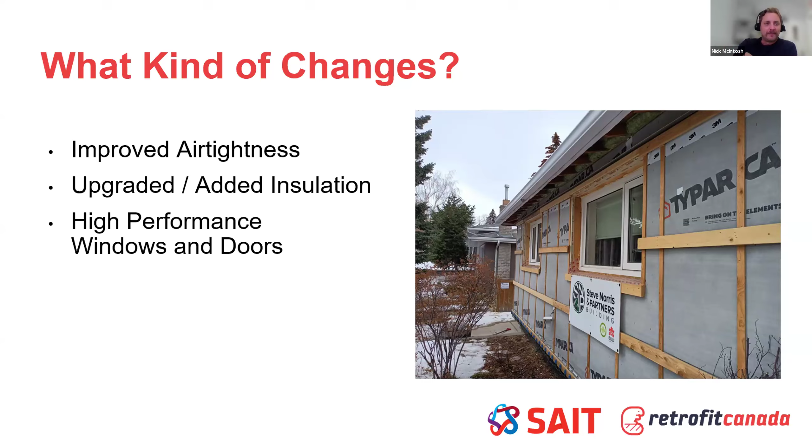As I mentioned earlier, those were building envelope focused deep energy retrofits. So you'll often hear us talk about a building envelope first approach. That means making the building as airtight as possible, adding as much insulation as we can to prevent that heat loss.

Once we've reduced the amount of energy required to heat the home, because if we insulate well, make everything airtight, and use high quality windows, then that heat or cool air stays within the house longer. So we don't have to use our heating or cooling system as much, and we can usually bring our heating system down in size.

So with a building envelope first approach, it's about reducing the amount of energy you need in order to maintain comfort and indoor air quality first, and then changing things to electrification that can be powered by on-site renewables.

When we're talking about electrification, upgrading to efficient heating - currently we're very commonly in Alberta using gas-powered forced air furnaces. So can we switch that over to a heat pump, which is much more efficient, requires a lot less energy, and is electric instead of natural gas?

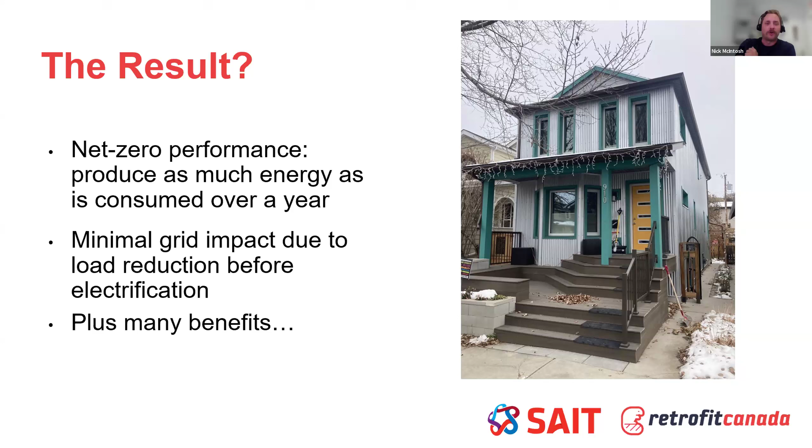This results in minimal grid impact due to load reduction before electrification. One problem that's been happening is if we don't have renewables on site to help with powering, we're putting strain on the grid. So we want to reduce the amount of energy we need and start putting renewable energy production with our buildings.

There are also many more benefits of deep energy retrofits that you don't necessarily see. This is a big thing we need to talk about, because some of this you can't really quantify until you've actually been in a building that has had these high performance renovations done, and you feel it for yourself. It's not necessarily something you can show anybody on a computer.

A big benefit of deep energy retrofits is improved occupant health. We're getting continuous fresh air coming into the building through ventilation systems, with good filters filtering out indoor or outdoor contaminants such as forest fire smoke, allergens, or anything like that. Constant fresh air is provided into the house, which allows us to stay more healthy.

Another thing you don't necessarily see is that we need to maintain a comfortable relative humidity in the house. If we get too low relative humidity, that can dry out our sinuses and we can end up getting sick. If we get too high relative humidity, that can lead to mold growth and things like that, which can affect our health. So improved occupant health is a very big benefit of high performance renovations.

Improved thermal comfort: we're wrapping the entire building in good insulation and making it airtight, which prevents cold spots within the wall assembly. So we just have a more even temperature throughout the building. We're trying to eliminate cold spots, like not being able to use the edge of a room because in winter it's extremely cold 5 feet into the house from the edge of that room. Nobody wants to go sit there.

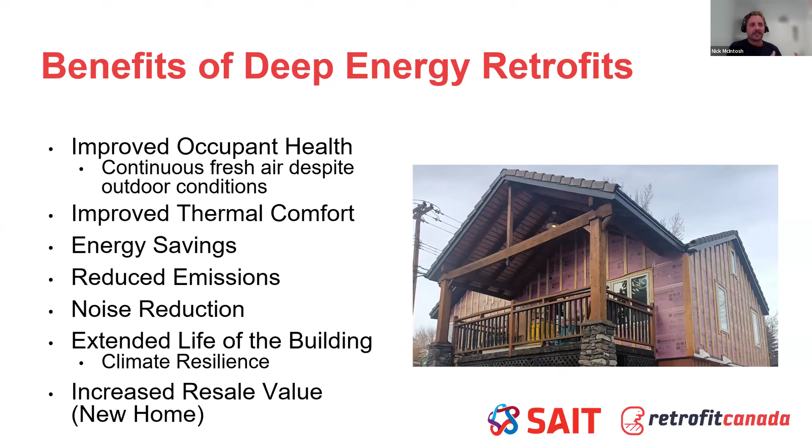And then increased resale value. Just by doing renovations, even, you're increasing the resale value of that house. By adding more comfort, improved thermal comfort, and energy savings, we've just increased the resale value of that home right off the bat.

So we have found certain obstacles to deep energy retrofits taking off at a very large scale. Obviously the big one that everybody asks about right off the bat is the upfront expenses for a full deep energy retrofit. They can be quite high. What we've seen so far is doing a deep energy retrofit to that net zero level, you're looking around $150,000 to $250,000.

But when we're looking at that, there are some things we do need to consider. We need to consider the cost of things that already needed maintenance. So if we were already planning to replace our heating system because it was at end of life, an old furnace from the 70s, we needed to replace that anyways. We need to consider that that needed to happen no matter what, and what is the additional cost to get it to that high performance heat pump? So there were certain things that had to be done anyways that would have been accounted for in a renovation, and what is the additional cost to do that deep energy retrofit, minimal compared to what you were going to do anyways.

And then we need to consider the total cost of ownership as well. We're not just looking at how much it's going to cost and the payback period over time. We need to consider that total cost of ownership and monthly cost of ownership, where we have a bit more stability because energy bills go up and down. But if we don't have energy bills to worry about because we're net zero, we have a bit more safety month to month in terms of what we're paying. So we're a little less in danger of being affected month to month by doing these deep energy retrofits.

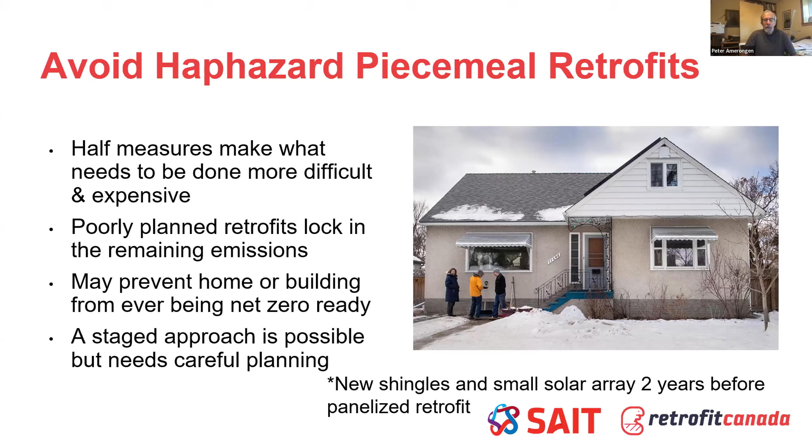Retrofits are expensive enough and difficult enough. We don't need to go backwards and spend extra money and do extra work that would be unnecessary if we took the time to plan ahead. So in this example, this photo on the right, this was a panelized retrofit that happened in Edmonton. They put new shingles and a small solar array on 2 years before the panelized retrofit. When they did that retrofit, that roof ended up becoming redundant anyways, because they added a roof on top of the existing roof. That was the only way to get any decent amount of insulation - they had basically a 2x4 up there. So they replaced those shingles, and then 2 years later, they put a new roof on top anyways. If they could have waited those 2 years, they would have saved all that money from having to shingle that roof.

So in order to plan for one of these phased retrofits, or even if we're going to do the retrofit all in one go, we have a retrofit roadmap that we recommend following. Before starting any work, do a building evaluation and an energy model, so you know where that house is at and what we need to do to make it the best version of that house for the 2050 goals that we have.

In that building evaluation, we're looking at, is it even a viable option to do a deep energy retrofit? If it's not, does it need to be a tear down and rebuild instead? We want to evaluate that, because we don't want to put too much effort into deep energy retrofitting if it's a house that's going to have to come down in 10 years anyways. It's just money and effort not well spent.

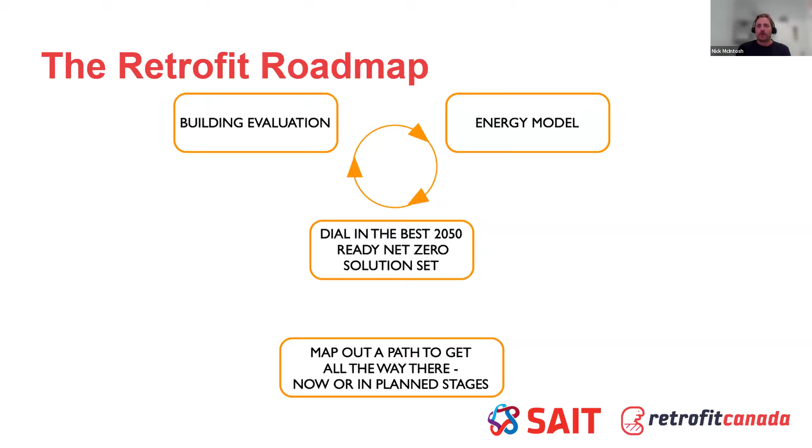So that allows us to dial in the best version of that house for 2050 in order for it to be net zero. One thing Peter has said is, what does this house look like in 2050, and what is the avenue for us to get there? So we map out that path to get there. What does that look like for planning? Are we going to do it in planned stages, or complete that retrofit in one shot, or plan it out throughout multiple phases?

Within that roadmap, we have a few different phases that we recommend. This doesn't mean doing a phase retrofit - this is just stages or phases within that roadmap. Phase one is that assessment phase: getting an idea of the client and project profile, doing that initial assessment on the house, and a preliminary retrofit scope. Then we move into the design and contract phase, where we're doing a detailed analysis of the home, taking time to do that planning, do that budgeting, come back. Do we need to make other changes to accommodate the budget? What does that look like moving forward? Then getting that final scope into play, and moving into the implementation phase.

So the actual construction of that deep energy retrofit - what does that look like? Is it a phased retrofit where we have to do certain things first, then wait a bit and do something else? Are we doing building envelope sealing first, insulation, maintaining that air tightness, and then waiting a couple of years to do the mechanical system?

One thing we do have to consider though is thinking of the house as a system. If we do upgrades to a building envelope and make it nice and airtight, but the home doesn't have any mechanical ventilation, there's going to be a cause and effect by doing that.

So those are things we have to consider in that planning phase, if we are doing a phased or staged retrofit.

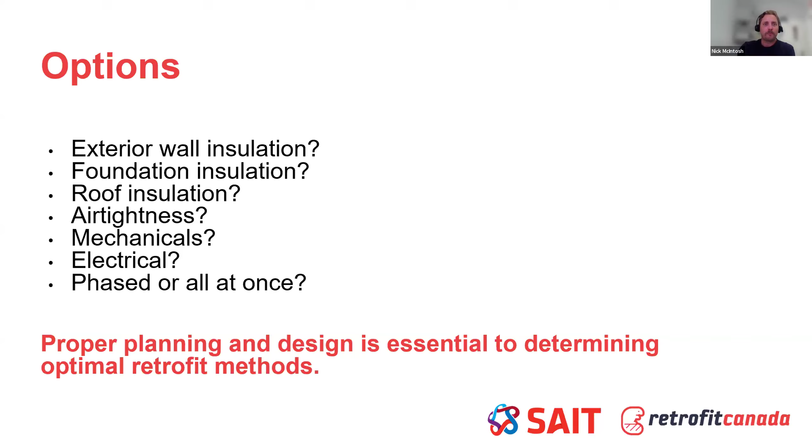There is a lot of work still ongoing to help us get deep energy retrofits going at a larger scale. Retrofit Canada and SAIT are working together to share a lot of knowledge that people in this industry have. Retrofit Canada has a repository of retrofit information from actual completed projects - that's at retrofitcanada.com. There's a lot of case studies in there.

We're still continuing to add case studies - we've got lots behind the scenes that we need to fill out and put up on Retrofit Canada's page. We're doing a lot of webinars similar to this one, with more coming up featuring case studies across Canada, as part of this Deep Energy Retrofit 101 initiative. There's also an extensive training program we developed here at SAIT, geared for contractors.

We delivered the pilot in spring 2025. We got some good feedback, and we're now doing some of those iterations and changes based on that feedback. I believe there is actually a delivery happening starting in November. So that course is going to come out geared towards contractors, on how to do deep energy retrofits and things like that.

A lot of what we do is possible because of funding from Natural Resources Canada, so we can't thank them enough for funding us and helping us get this training out there. Training is essential for both trades, designers, and everybody involved in order to get this going at a larger scale.

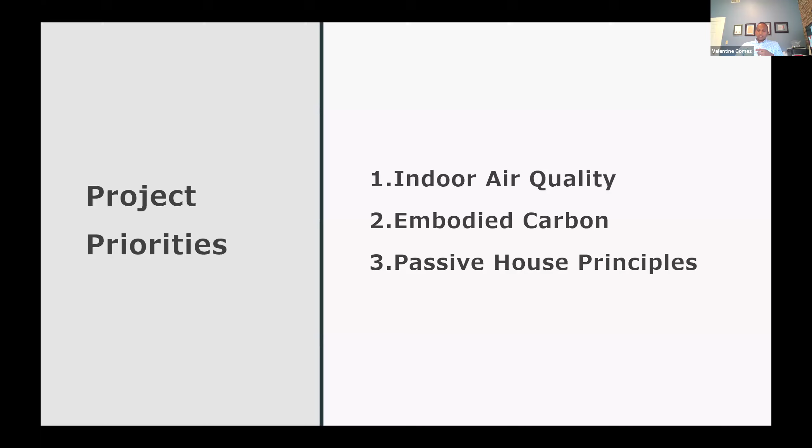And finally, passive house principles were brought in to help overall drop operational emissions. Like Nick had alluded to, your main principles are super insulation, airtight construction, thermal bridge free, high quality windows and doors, and a ventilation system with heat recovery.

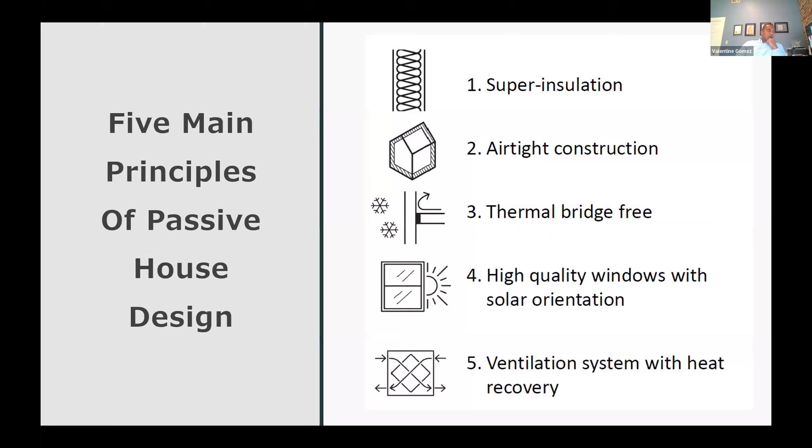So the initial EnerGuide results that we had done on the house basically came in at a whopping 171 gigajoules per year, and an air leakage rate of 12.17.

The house was built in 1937. It had good bones, and a lot of these older homes with good bones tend to breathe really well, because when they get wet, they have the ability to dry, and that's why they've lasted the test of time, per se. But our goal was to address some issues, there was comfort issues, there was...

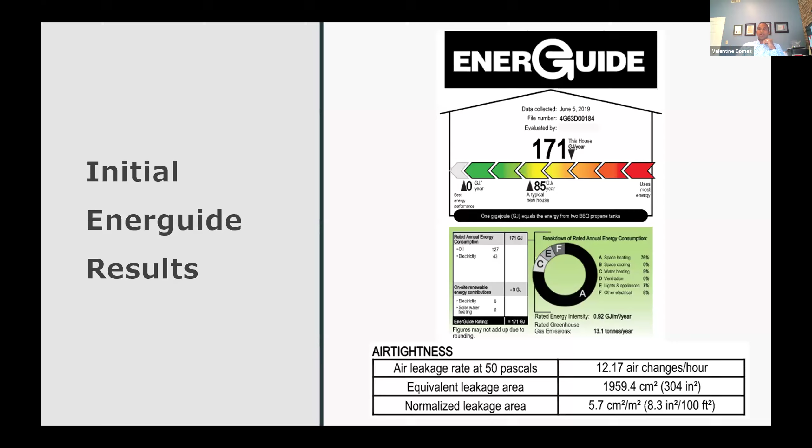the air wasn't great. I have pretty bad allergies, and even during allergy season, with our windows and doors closed, there's still air coming in. I would still be sneezing throughout all of May, June, July, so it wasn't great.

The one thing I will note, we had renovated the bathroom in 2018, so that was actually one of the rooms we decided against gutting. But other than that one bathroom, the entire house was fully gutted.

Like Nick had mentioned, you want to try and have the planning in place, but at the time we didn't know - we had assumed this was going to be our starter home, and then it kind of evolved to potentially now our forever home, or close to it, or at least I call it that. My wife does not.

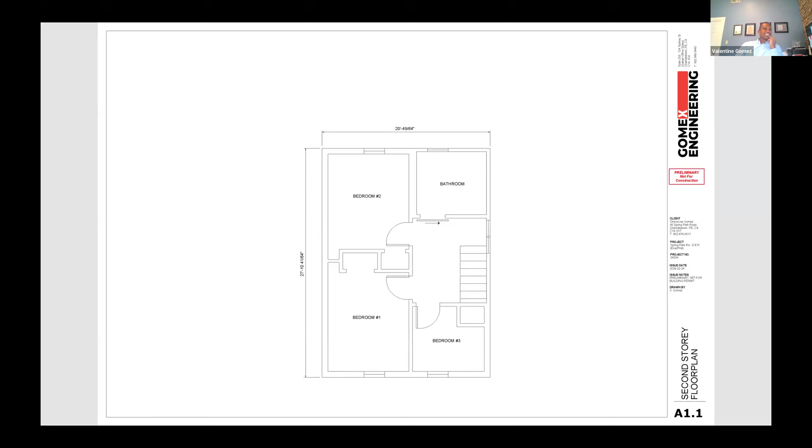For the thermal envelope, I actually considered our basement as unconditioned and outside of the thermal envelope, and I insulated our basement ceiling and our main floor. We had a polypropylene mesh that we'd run up along the ceiling, and then we filled the joist space cavity with dense packed cellulose.

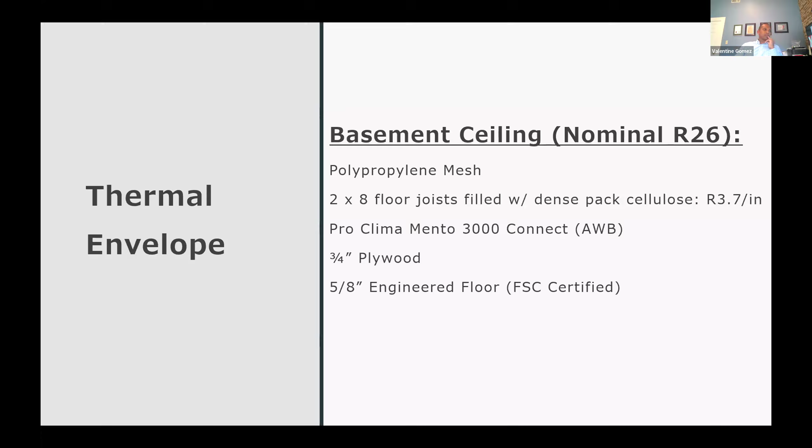We left the original 7/8-inch wood plank sheathing, and then slapped on a 5-inch Larsen truss on the exterior, and then our air weather barrier, more strapping for a ventilated drainage cavity, and then our wood siding. So, stealing from Nick's analogy, I kind of had taken a bear and given it a jacket, because I added insulation on the interior and on the exterior as well.

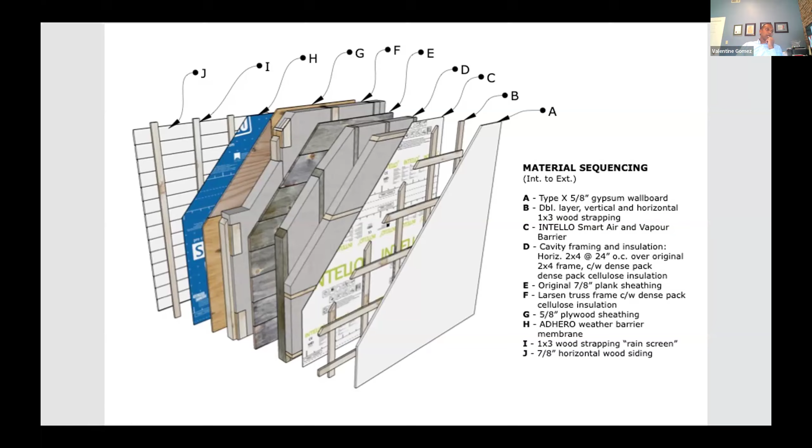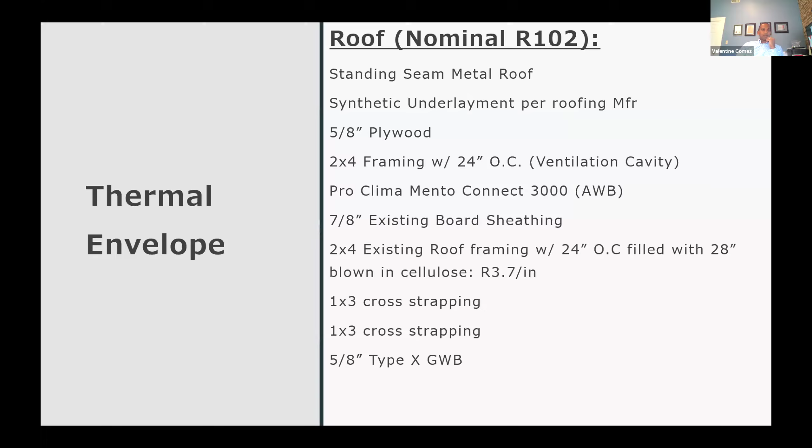For the roof, it was a gambrel style roof. So part of it is our wall assembly, and part of it's the actual roof attic. We had about roughly 28 inches of insulation laid down.

So this is what was existing, and then we came in - this is the sequencing. We shimmed and leveled the floors and laid down plywood. We added our 2x4s onto the walls, then came in with our vapor barrier and strapping, and added the insulation.

I will also note this one specific point I'd flagged with my thermal cam as a thermal bridge that ran the entire portion of the main roof. It was just due to the fact that you had your insulation going from almost 30 inches in your attic tapering down to that 3.5 inch section.

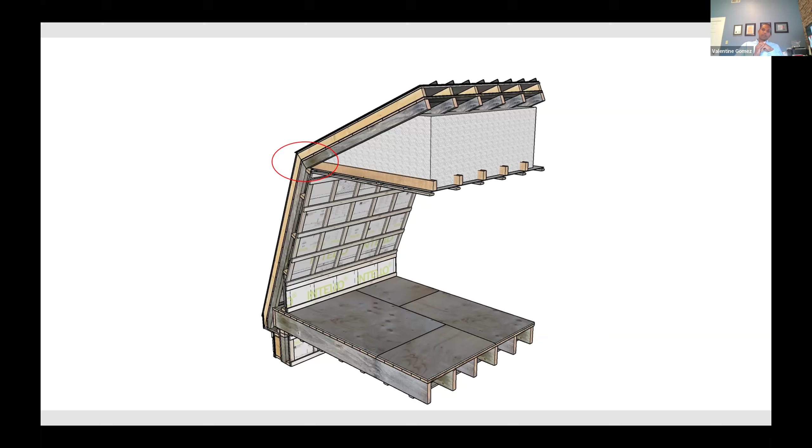I also needed a way to stop my dense packed cellulose from that wall section blowing up into the attic space, so we actually had to cap that with plywood. That created a cap for that 3.5 inch space, so that alone was also a bit of a thermal bridge. Then we came in with the drywall over top of that.

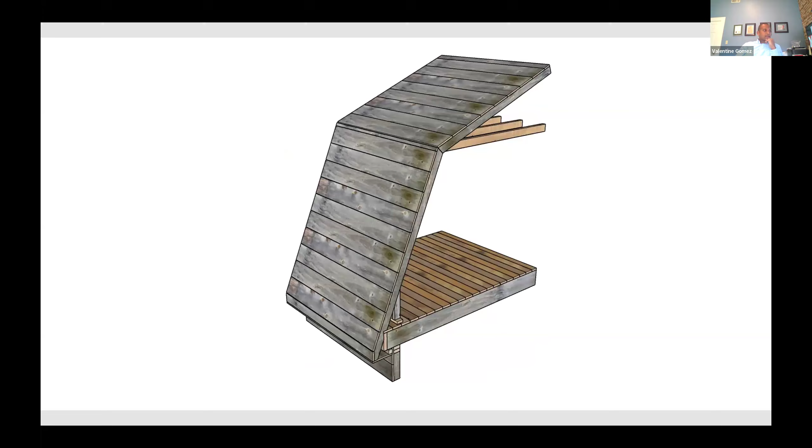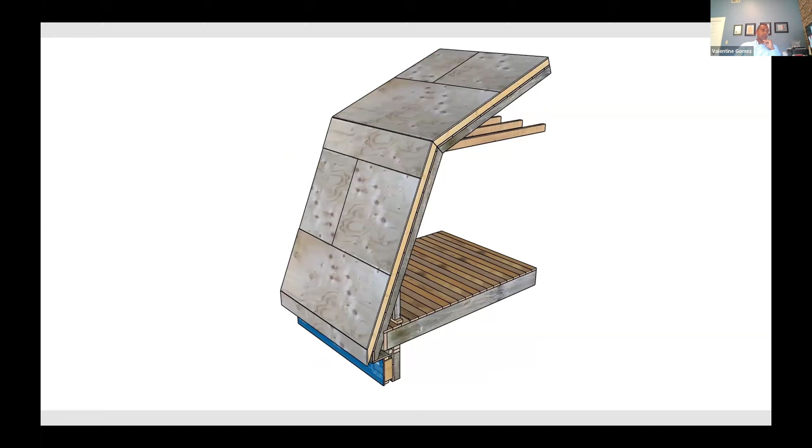On the exterior, on the flip side of that, we had our original roof 7/8 inch plank roof sheathing. We came over it with a Mento Connect 3000, then slapped on 2x4s up on their side again to act as our ventilation cavity, then went over that with 5/8 inch plywood, added a synthetic vapor closed membrane, and then a standing seam metal roof on top of that.

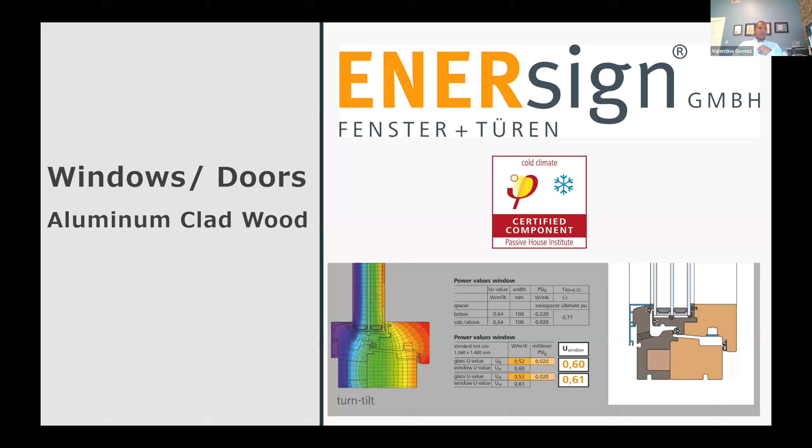Windows, we went with Enersign. They were at the time one of two aluminum clad windows that were Passive House cold climate certified. And it ended up being great that we went with Enersign, because I think the other company may have ended up going out of business while I was in the process of putting in my deposit.

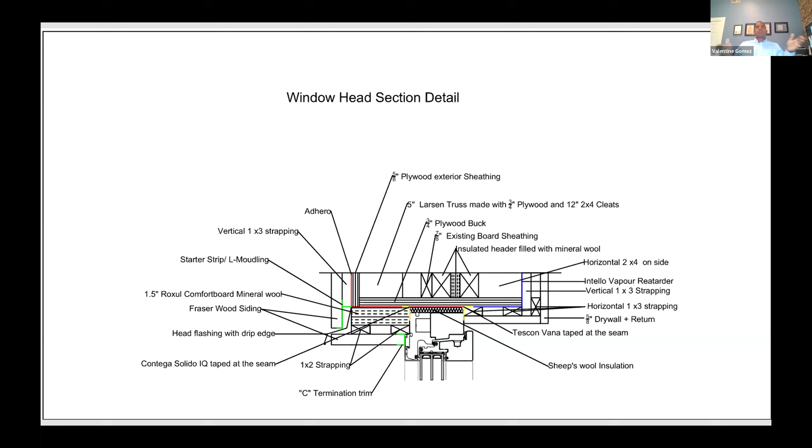These are some of the details for the head, jamb, and sills that we went through. I will note one change here that I would have done that I didn't: around the entire window we were able to over-insulate with 1.5 inches of comfort board 80 on the exterior. We were maxed out on the 1.5 inches for the sill, but I probably could have gone to 3 inches on the head and jambs as well, since we had the space, and it would have just made the window reveal a bit smaller, which would have been fine.

For mechanical systems, we have a Zehnder Q350 ERV. There's also a Coway Airmega 150 HEPA filtration near the kitchen, because my range hood actually recirculates, but my HEPA filter catches the particulates that come in, so we avoided that penetration for the vent. Dehumidification is handled by a whole house dehumidifier, pulling off the heat pump.

Heating's done through one Fujitsu 15,000 BTU mini split, and we did install 2 Convectair electric backups. The only reason they got installed was because they were already there and I didn't know what to do with them, so we just put them back in. I don't foresee us using them, but they're there as a backup if we need it.

For indoor air quality monitoring, there are 3 Airthings View Plus units, 2 in the bedrooms, and 1 on the main floor, monitoring air quality 24/7.

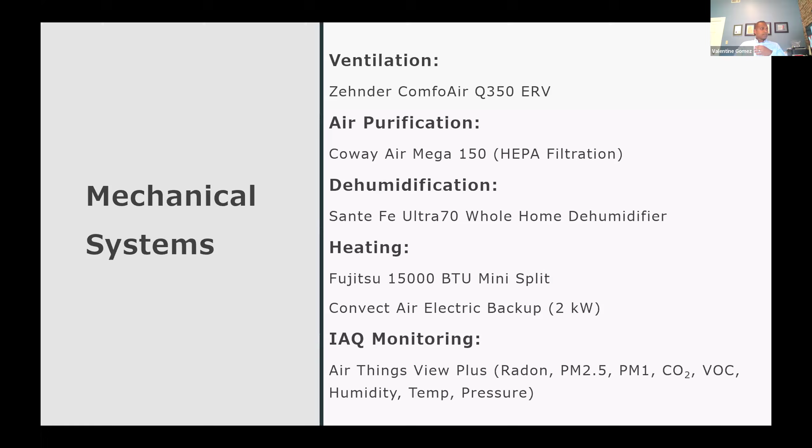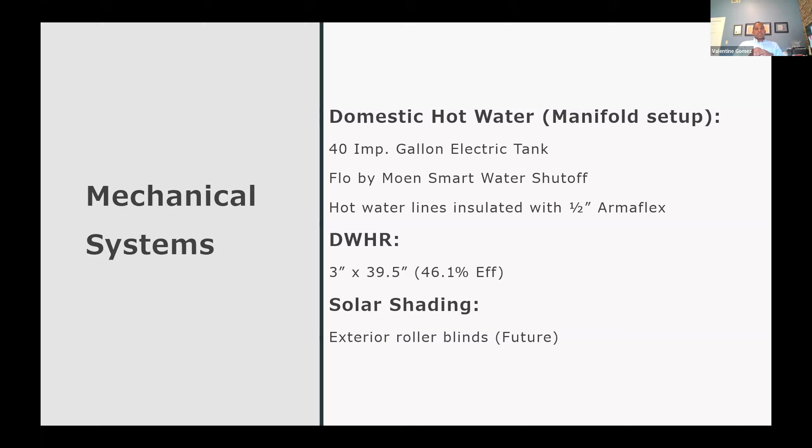For domestic hot water, we kept the existing electric tank for now in our piping, and I'll talk about that on the piping side. But I did make allocation for a future heat pump hot water heater as well. We're just going to wait till this hot water tank reaches its end of life, and then we'll swap it out. There's also a Flo by Moen smart water shutoff.

Mostly the reason for that is, from insurance claims and stuff, one of the biggest causes of damage to a house is water, and the flow meter sensor will test for leaks daily and basically shut off the water and either give me a call or send me an email to let me know there's a leak, and they'll shut off the water automatically.

The hot water lines are insulated with a 1/2-inch Armaflex. There is a drain water heat recovery system that's been set up for equal flow, feeding the cold water on the showers and also the hot water tank.

Solar shading is currently planned, but it's in the future. It's something that we'll definitely be looking into.

For appliances, we went with the heat pump dryer to again avoid the penetration for the vent. The range, fridge, and dishwasher are all coming in the near future.

Electrical: I would have liked to have stuck to 100 amp service, but there's a future possibility of us putting in an additional accessory dwelling unit in our backyard, and if I do, it will require its own set of mechanical systems, so at that point it would have required an upgrade anyway. So we decided to future-proof it and upgrade to 200 amp.

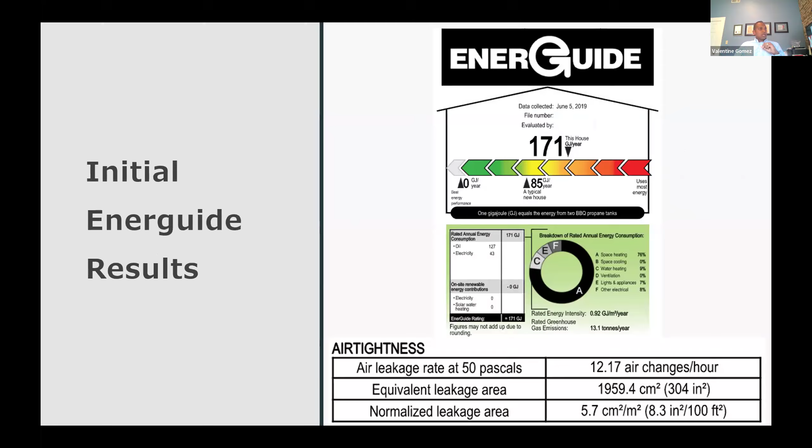So looping back around, the initial Energuide results were at 171 with 12.17 air changes, and our final Energuide results dropped to a 68 and an impressive 0.57 air changes per hour for air tightness, which I was quite pleased with.

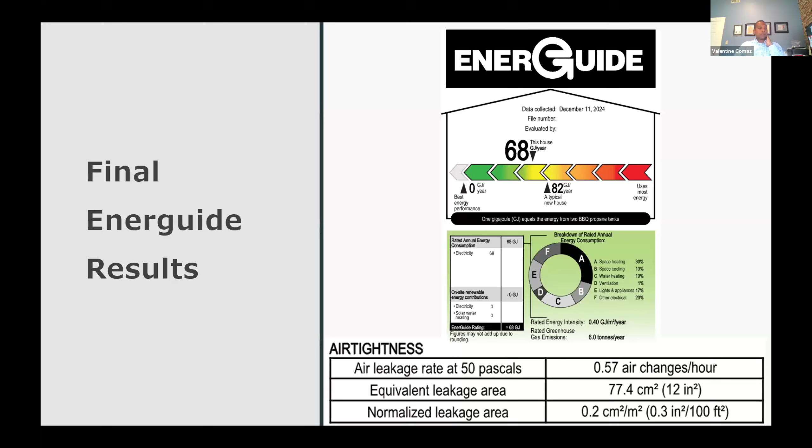So to summarize, the annual energy consumption dropped by about 60%, space heating demand dropped by about 84%, and air tightness improved by about 95%.

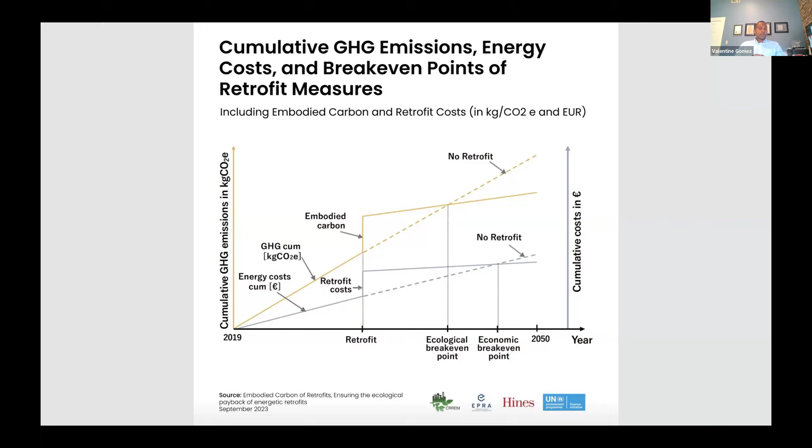Speaking of economics, overall our retrofit ended up costing about roughly $350 a square foot. That doesn't include the purchase of the initial house back in 2017. Indoor air quality ended up being a bit of a premium.

Embodied carbon ended up being revenue neutral when you considered the rebates from Efficiency PEI. And in passive house, obviously the windows and doors were definitely a premium. In the end, indoor air quality was definitely the premium.

But if you can choose to put any sort of value or tangible amount to your health in your future, this can also be easily justified. I don't know if you can play it out in how you define living an additional year, or 20 days less in the hospital when you're 70, right? Those are all tangible things - what do you place a value on that for?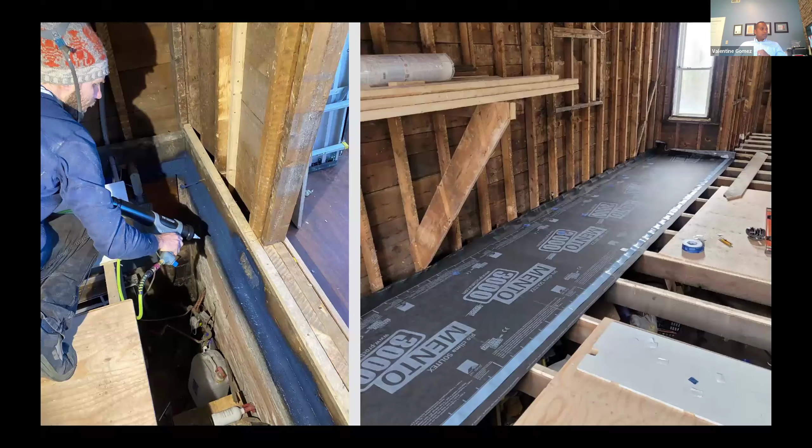So we'll quickly skim through some pictures. I purposely left most of the pictures out, but these are actual pictures that I can talk through.

So when we started the demo, one of the first things we came through is we Visqueened the rim joist at our basement to main floor connection. Then you can actually see instead of sistering on new joists to the existing joists, we lasered the floor and cut extremely long shims and sat the shims on top of the existing joists. You saved some lumber, and basically one stud was able to do 3 joists.

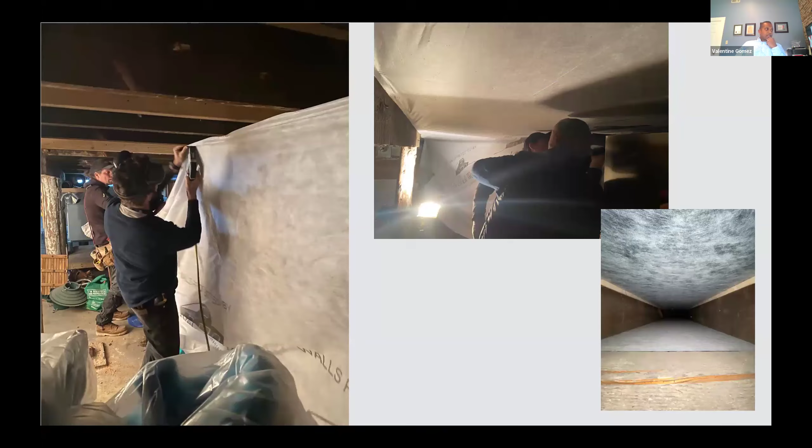And then we put down our membrane and then our plywood over that to protect it. And then we went down to the basement and we put up our mesh screen in the ceiling in the basement.

This is a picture on the bottom right here of the cavity looking down. So above is the Mento on the main floor, and then the bottom is the mesh screen. So this entire cavity got filled with dense packed cellulose.

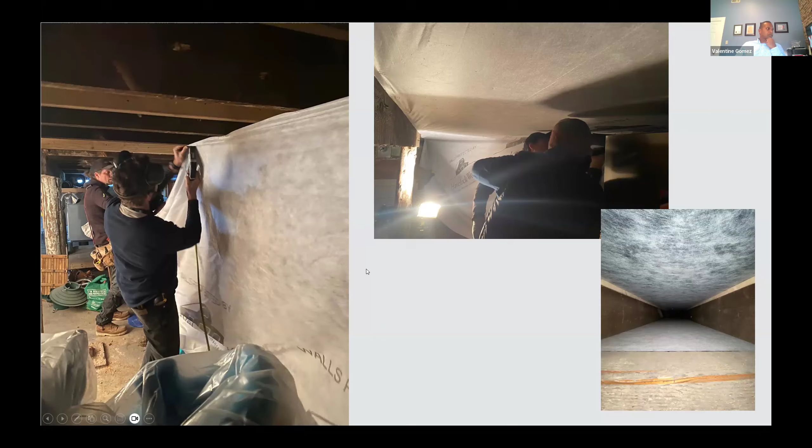The front of the house had a bump out with 4 individual windows and an eyebrow on the top. That bump out, from us living in there during winter, was perpetually freezing - you just couldn't stand there because it wasn't insulated properly, it just let cold air in all the time. So we decided to eliminate the bump out, reduce the thermal bridging, get rid of the eyebrow, and simplify the 4 windows down to one large 8-foot window that was part fixed, part operable.

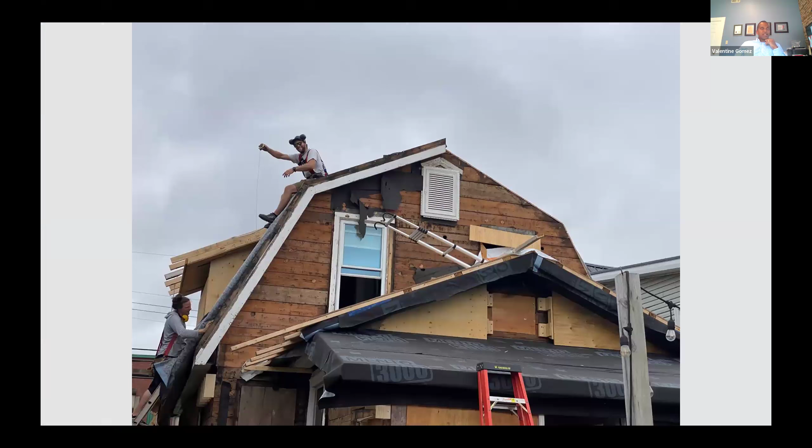The other thing I should note with the interesting thing with our house is that there were actually 4 roofs on the house. So in this picture you can see the front porch and then the main roof, and this is the back of the house. Then the 3rd roof is actually a roof above our kitchen, and then there's our back porch roof, which is a mono pitch off of it.

So we did 3 or 4 different things on each roof because I wanted to experiment with retrofitting and what should be done, what's easiest, what works and what doesn't, what's time consuming.

On the front porch, we ended up rebuilding the entire thing, so we mono pitch framed that. On the main roof, we did a chainsaw retrofit where we ripped off the existing roofing, and you can see part of it already cut off on the right side. On the kitchen roof, we kept the existing roof as is, then built on ladder blocking along the rake and wrapped that with a membrane. On the mono pitch side, we wrapped it with the membrane and added ladder blocking to extend the roof out to carry past the Larson truss.

So all of them were an interesting way to do things, and there's a reason why, if you've watched enough of these webinars, people say chainsaw retrofits are the way to go. I can attest to that. It definitely is the way to go.

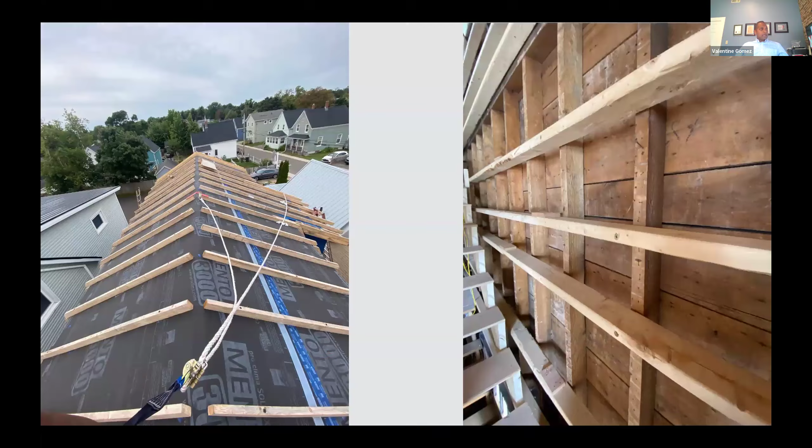Here's a view of the roof with the 2x4s, and then also when we started to move to the interior with the 2x4s attached onto the existing original 2x4s.

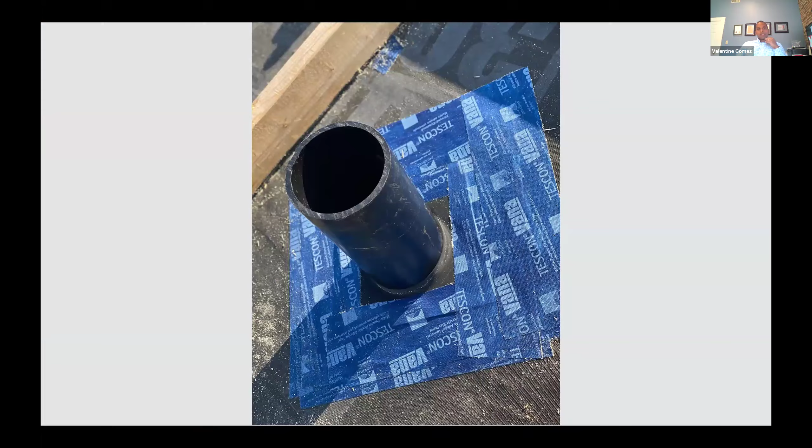I put this picture up here, it's our plumbing stack. Our existing house prior to renovation had 3 plumbing vents or stacks going out, plus 2 chimneys. What started this whole renovation process was that one of the chimneys was starting to leak because the flashing had let go, and one of the plumbing vents had started to leak because the boot the plumber put on was done incorrectly. So we condensed all of this, and the only penetration I now have through my roof is the one plumbing stack, which is unavoidable, you have to have that one penetration.

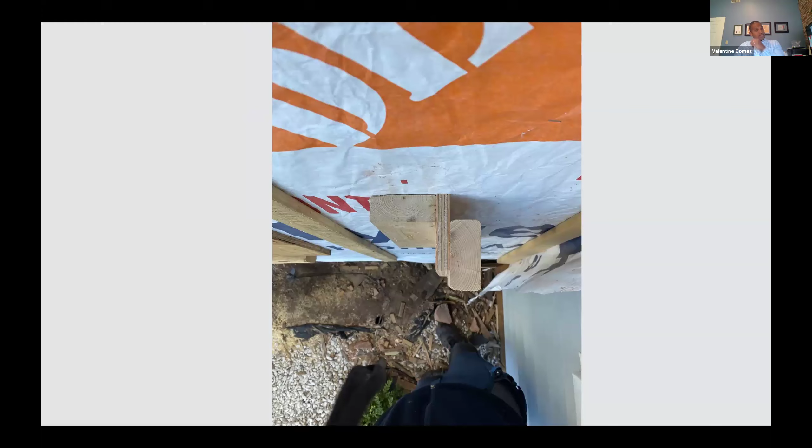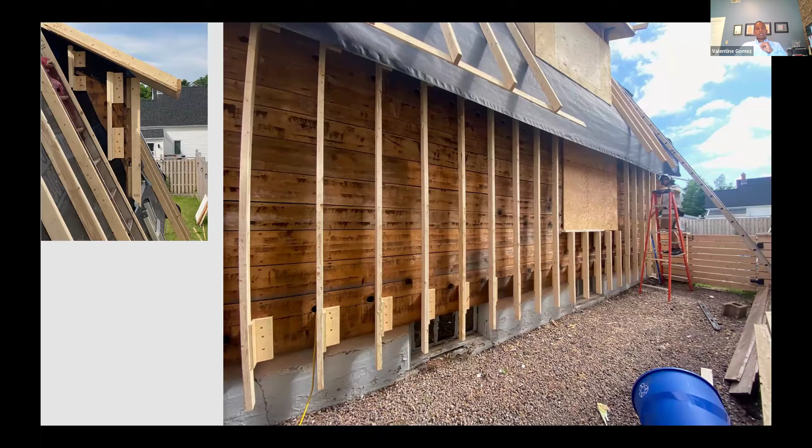And then here's us testing the different Larson trusses. This was basically a plan view of the cleat to use for the Larson truss. We had 2 of these connected via studs. I had a structural engineer sign off on the design I came up with, and he approved it for the wind load and the heights. The cleats were 12 inches tall and allowed to span 10 feet, so it worked really well that we could use 2 cleats for the entire length of our house down on both sides.

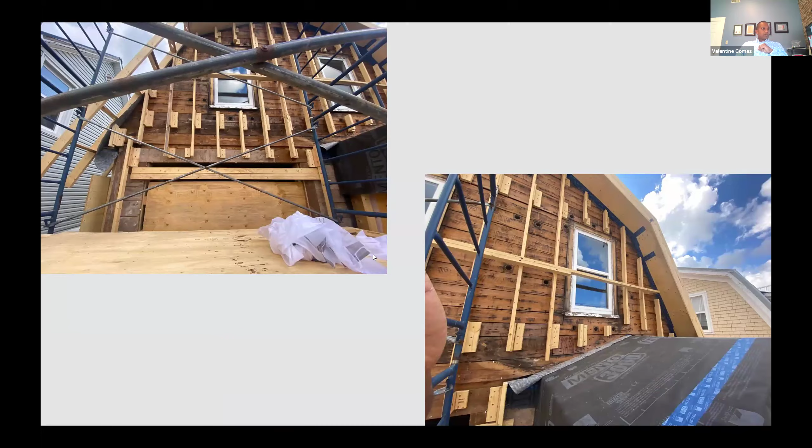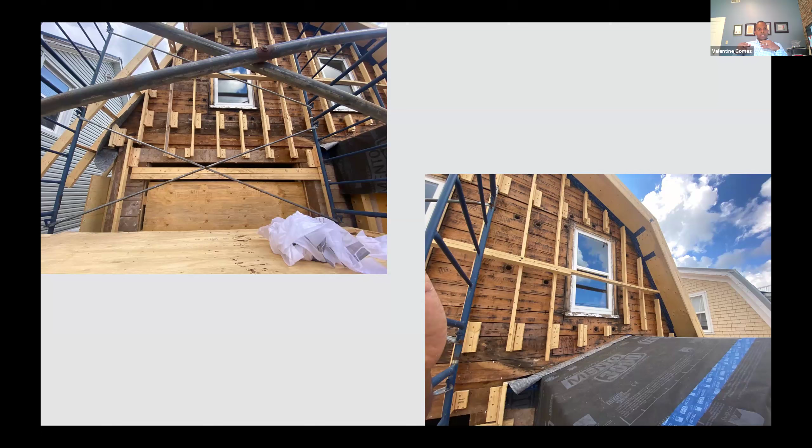So over here we had some horizontal bracing, this was actually temporary. We realized when we started putting these on that there was going to be a time gap between when the studs were getting put on and when the plywood was getting overlaid over them, and we didn't want any of these studs bowing or warping in the sun as they dried out. So we ran these horizontal L brackets along just to tie them and stiffen them so they wouldn't warp on us, and then as we went to put the plywood on, we took the bracing off and put the plywood up.

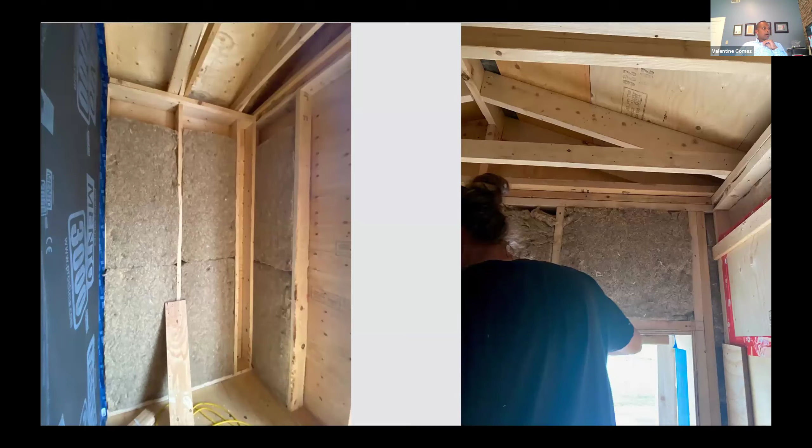This is our front porch getting insulated with hemp wool from the interior. You can see that we did frame it up here, mono pitch framed as well.

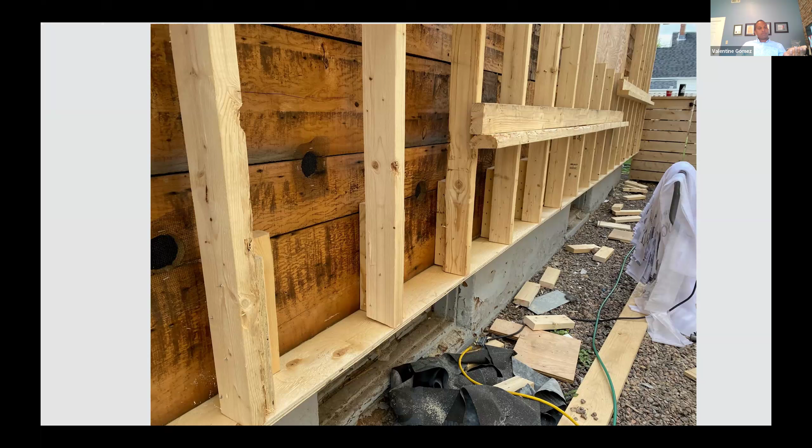The bottom of the Larsen trusses were capped with more 5/8 inch plywood, and then we taped that connection with one 12-inch wide tape that went down to the concrete as well. The other thing I wanted to chat about is these strips of polypropylene mesh.

This is also one of the lessons learned. There's only one company on the island that does dense pack cellulose. When I had them out to look at this setup, they were a bit uneasy, they'd never done anything like this, and they said they requested that I close off all of my Larsen trusses, just take some plywood or studs and close those off. I said that's going to completely negate the whole point of the thermal bridging and the Larsen truss. So we went back and forth, and in the end I basically said, look, I'll hang up these polypropylene meshes.

I'll staple the mesh so that it creates its own cavity between each Larsen truss. I said I'd take the time to do that if they would do a field test to see if it was actually required. They agreed to test a certain portion of our wall, but couldn't come for two weeks. I didn't want any further delay, so I went ahead and started putting up polypropylene mesh on every Larsen truss. But we left a portion of our front porch without it.

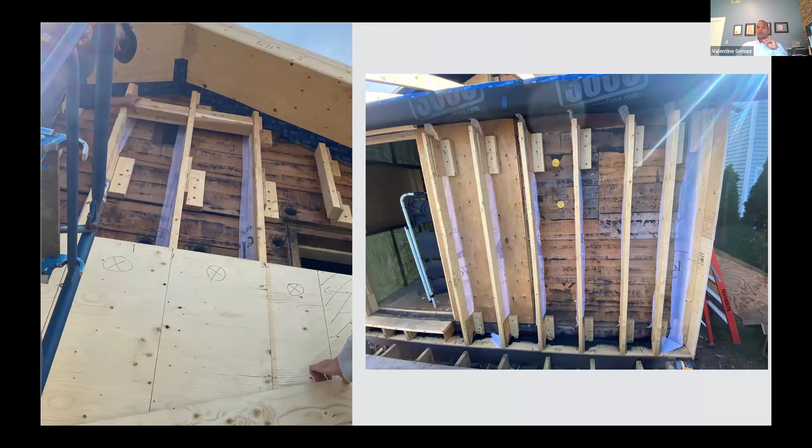We left one portion of our front porch without the polypropylene mesh, and they came in and tested it. This is the mesh I had stapled on - it took forever to do and wasn't something I was keen on, but I wanted to know if it was a requirement. They were worried about the cellulose flowing between the truss spaces and not reaching the required density if it kept flowing from one truss around the corner.

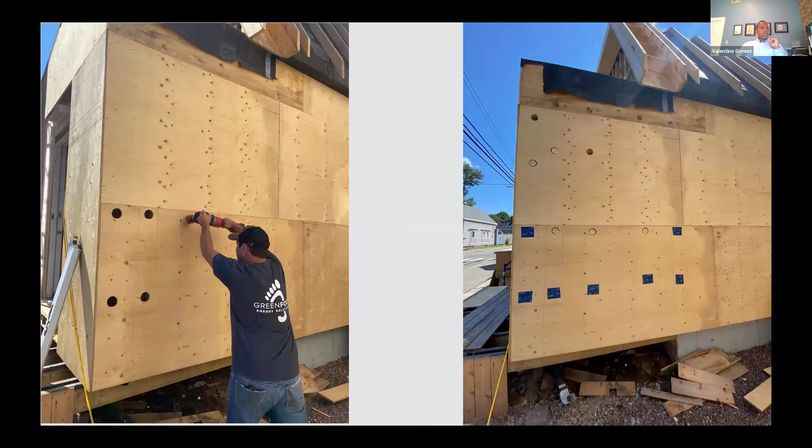They came in, and this face right here we ended up not putting any mesh screen up - you can see the mesh elsewhere, but not there. We also wrapped it around the corner to test if it would come through. In the end, the cellulose flowed essentially like water. It found holes I hadn't taped yet, just 1/8 inch, that we had to stop them filling with dense pack cellulose. I had to clean up the stud, tape it, and then they could continue, because it was flowing through the tiniest of holes.

So it was a good lesson learned that mesh separation is not an issue - you can actually fill that cavity. It was just a learning curve the insulation company needed to go through, and now that they've done it, they're a bit more comfortable doing it going forward.

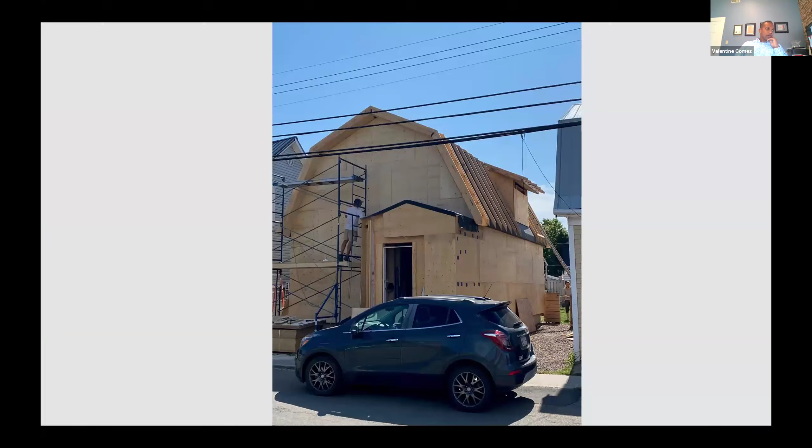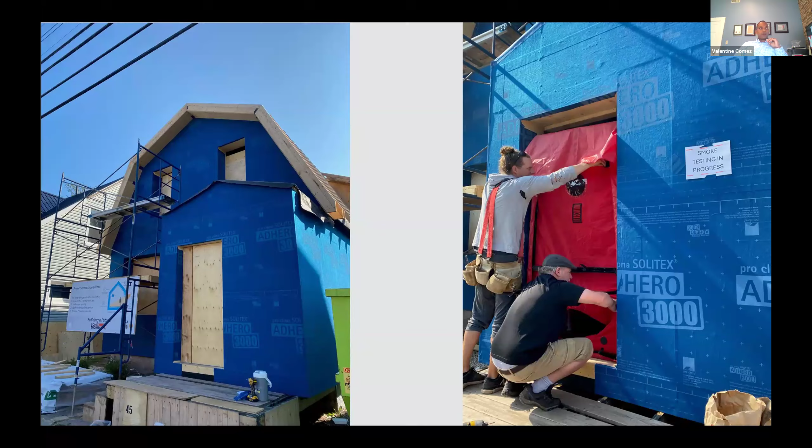As soon as I had our Adhero up, I ran a blower door test and a smoke test. Two minutes in, while positively pressurizing the house, we completely lost pressure and wondered what was going on. We walked around and found we'd actually blown out one of the plywood windows during testing - which was a very good sign. We had to repair the window and go back to the test.

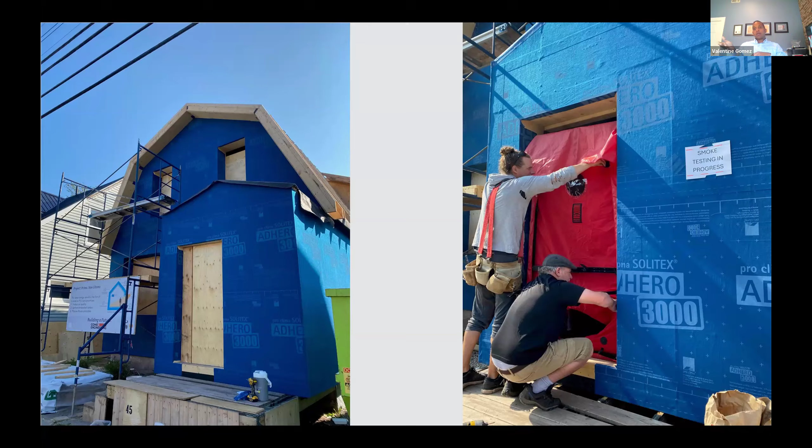We had also rented a fog machine, which was great - up on the roof with the Mento 3000 Connect, one of my carpenters had pulled the tape through but didn't actually press fix it, so we were getting smoke leaking from that entire seam. As a belts and suspenders approach, we went through and press fixed that seam, then went back and taped the entire thing as well, because once we plywooded over it, we'd never have access again. If it was going to leak, I didn't want something I couldn't access and solve.

Moving to the interior, this is the main floor - I'll point out our second floor joists that we ended up framing as well, and you'll see why in a second. As we brought our vapor barrier up, we taped it into that cavity, which also helped hold back some of the cellulose and provide a better air seal. It wasn't continuous because upstairs we connected it to our new plywood, so there was a tiny gap there - but in retrofits, your interior vapor barrier is not your primary air barrier, it's your exterior.

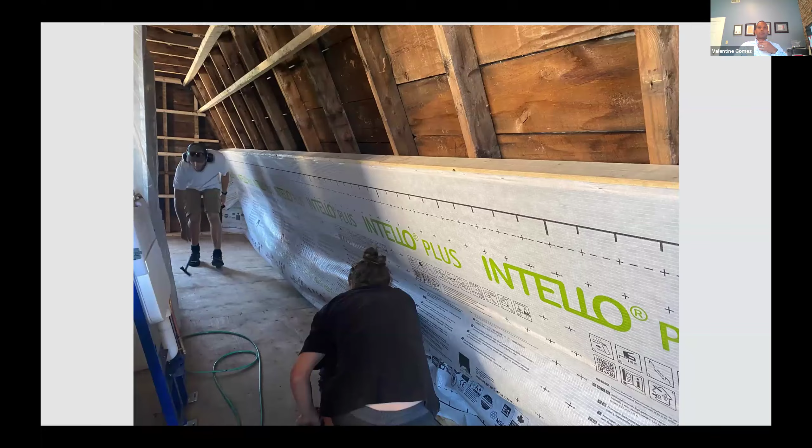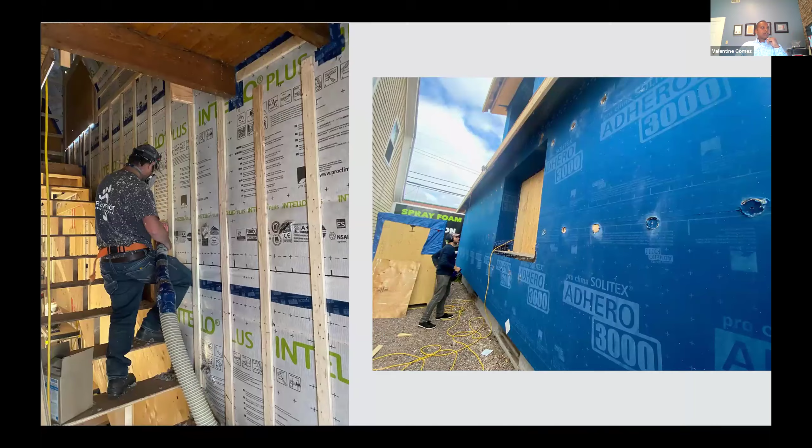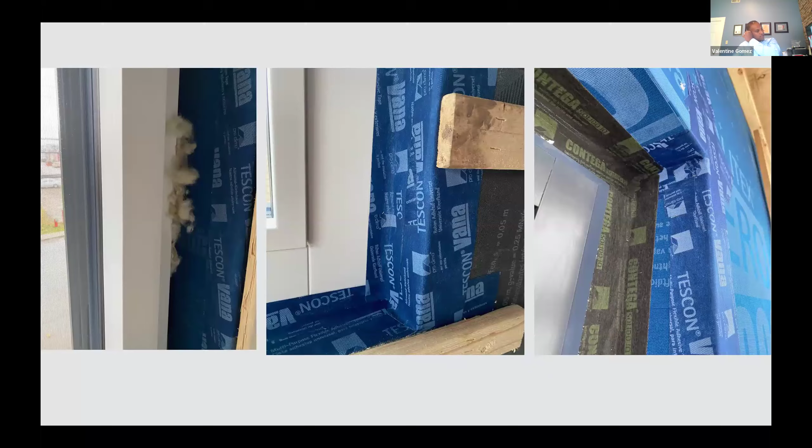This is the upstairs floor before it received its second layer of strapping. This is the cellulose going in on the inside and outside, then the strapping. We moved on to putting in our taped sills on all our windows. The windows then got stuffed, as I mentioned, with sheep's wool, and we used Tescon Vana tape on the interior and Contega on the exterior as well.

So we've heard of over insulating your frame on the exterior, but when we put the drywall in, we ended up having an additional cavity that was open. I had additional sheep's wool, so we over insulated the frame behind the drywall on the interior as well. This is us putting in our back door with sealant on top of our sill.

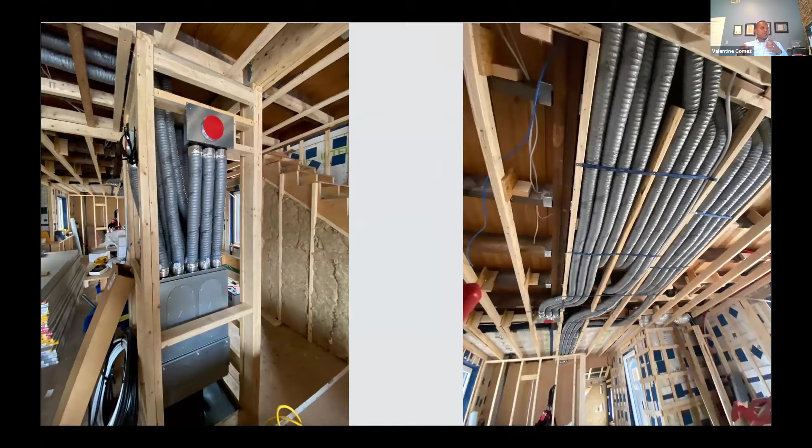And then our ERV install - we had one mechanical chase in the middle that did triple duty, acting as the chase for all of our ductwork. That's my silencer, and also the filter box for the ERV. If there's ever fire smoke coming up to Charlottetown from forest fires, I have the ability to add an additional HEPA filter on top of the filters already there to take out any forest fire smoke.

And there's activated carbon as well to take out any smoke. The chase also acted as the path for every single one of my electrical penetrations going down to the panel in the basement. At third duty, it also acted as our IT room for all of our IT stuff, so every single wire going down to every panel basically met back to this chase and then went down.

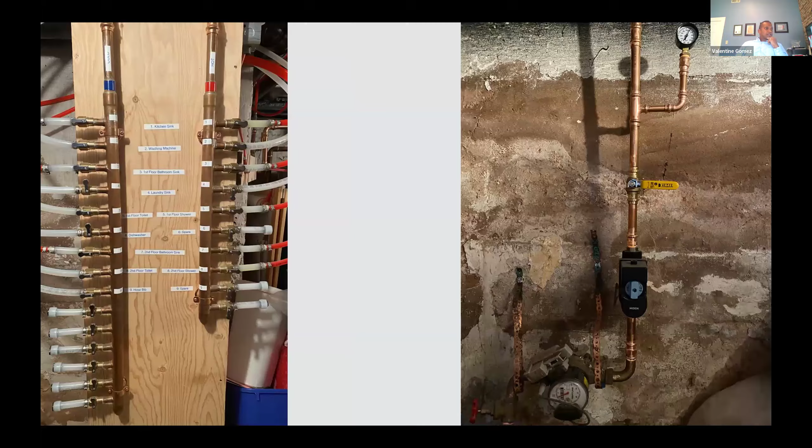This is the piping manifold for our hot water. So instead of a trunk and branch setup, I went with a manifold setup with 3/8 inch lines for all of our hot water where it was needed. And then that's the Moen smart water meter on the right.

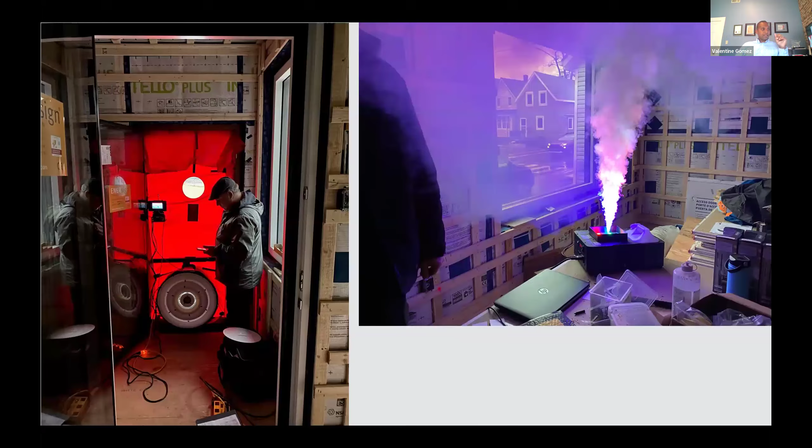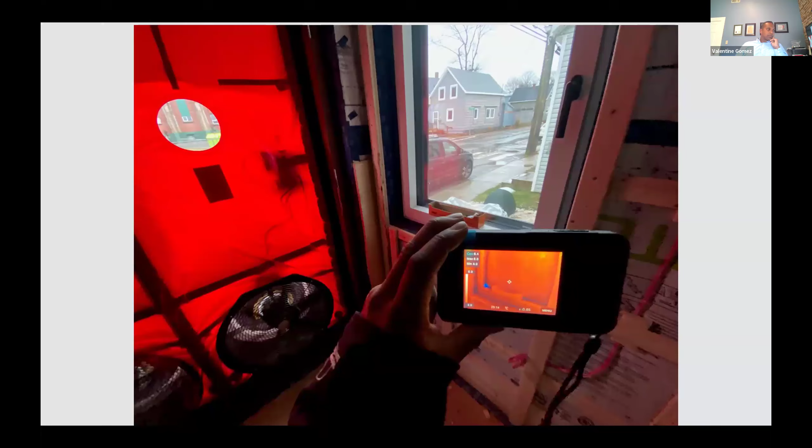And this is our final smoke test and blower door when we were coming through, along with checking for any sort of thermographic cams. And yeah, these are some finished, unfinished products at the end here.

At the end of the day, I can't really stress enough the importance of, like Nick had said, the importance of planning. Planning was so critical in this stuff.

There were a lot of times where my carpenters would just laugh at me because I'd be standing at a corner looking at a wall for 45 minutes. They'd ask, what are you doing? And then 2 weeks later, they'd come to me with a problem, and I'd say, this is the solution. It was nice and elegant the way it rolled out, but it was due to a lot of planning. Yeah, are there any questions?